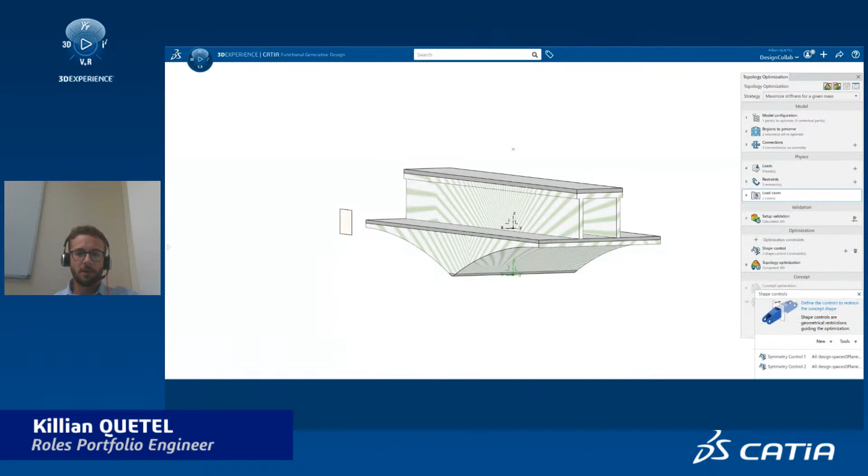So here we can see the reconstruction of the Bir-Hakeim Bridge in Paris, and in reverse engineering we recreate Paris. So here we can see the results. So the functional requirements were the wind, the vibration, the river flow, the subway, and the vehicles. And here we can see that we are on functional generative design.

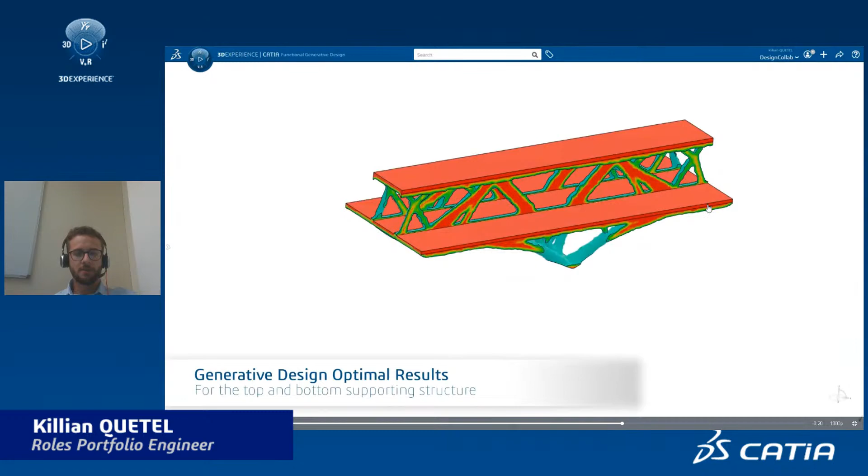So here we can see the design space of one quarter of the bridge. I will explain why later. And here we put the objective of our topology optimization. Here we can see our result of the bridge, and here we can see the reconstruction of the bridge at the end of this optimization.

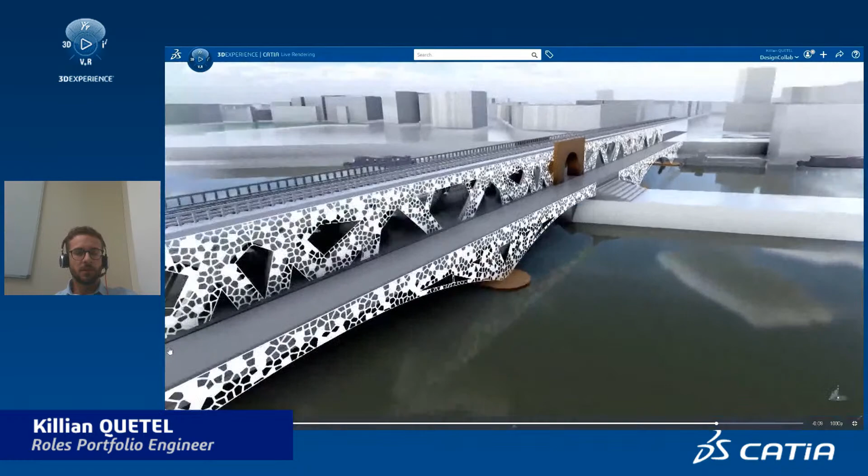And here we can see the final results with a little design we put on the bridge, and a beam reconstruction that we can see here, some beams. We will see later how we did this.

So here we can see the objective of the bridge. So our main problem is to show that with functional generative design, we can maximize the stiffness of the structure and minimize the weight, while we can also minimize the cost. So there is a lot of different scope in our project.

And here we can see the end-to-end workflow. This is what we saw in the video. The top one is about generative design, and the bottom one is about steel structure design. So in our talk, we will just talk about this part, the generative design part. This part is in the project, but it covers a large part of what we can do with CATIA and similar applications—we will focus on the generative part.

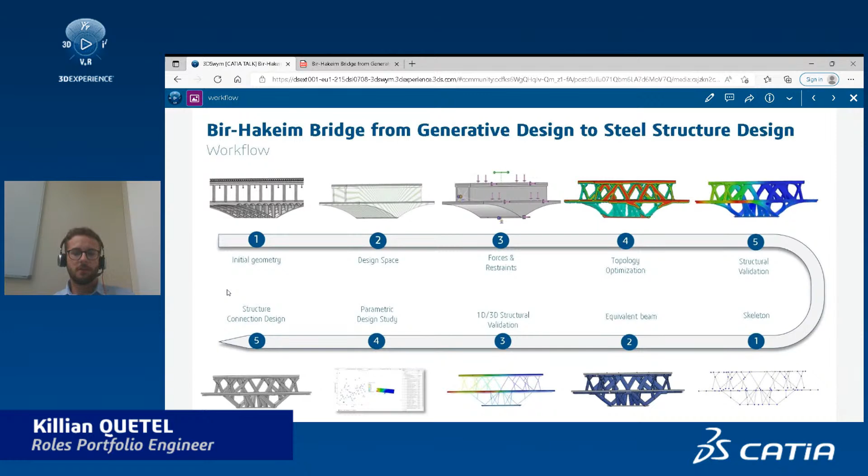So here we can see the first Paris reconstruction. We used some tessellation files to extrude and create the buildings. As we can see here, there are different sizes—here some big buildings, and here some small buildings. And we also put in some famous structures like the Tour Eiffel and Trocadero.

Here we can see the Bir-Hakeim Bridge and some other bridges, and some details like water. We spent about one month doing the full Paris reconstruction and adding details like that.

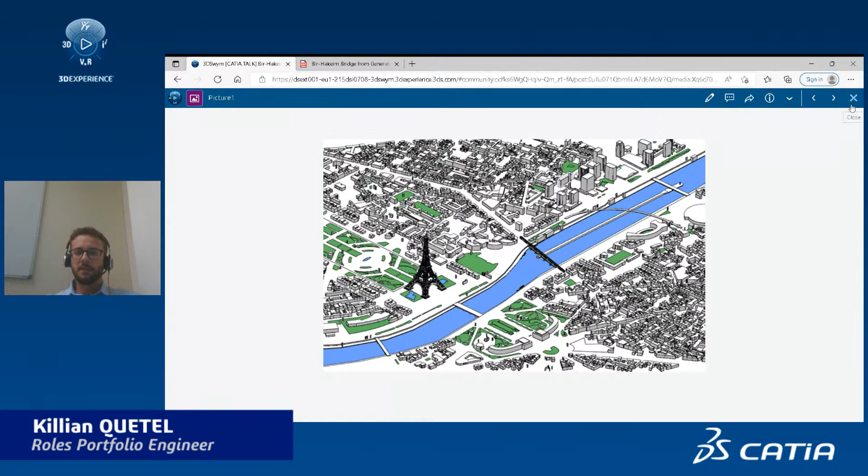And it was very long, but the result is very interesting. Here we can see another view of the results.

We start our project on just 1/4 of the bridge. Here we can see that there are 4 pillars in our bridge, and for our simulation it's better to just study 1/4, as we will have better convergence for the topology optimization, and it will be much easier for our computer to converge into a good result. So we just focus on this part.

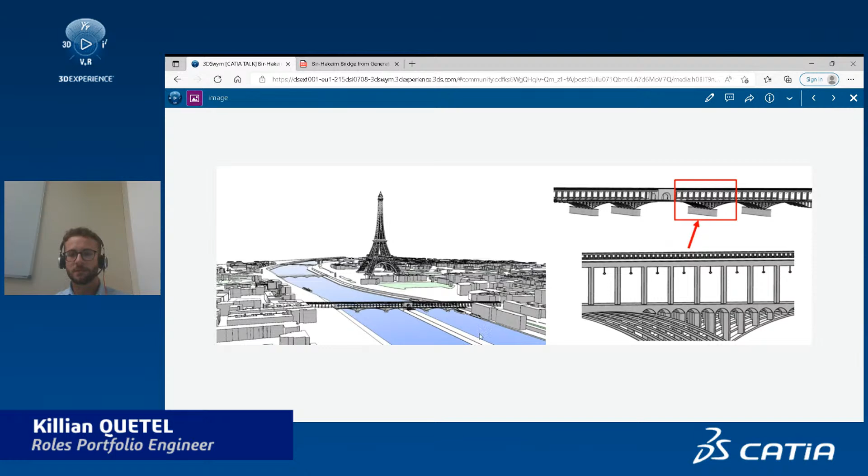And here we can see the generative design part. So we start by doing the design space, as we can see here, to let the barge go through under the bridge, to let the metro go into the bridge, and to let the vehicles go through the bridge.

And here we can see some loads like the metro, the wind, the vehicles, and we put some restraints, as we can see here: the symmetry, here a rotation in X, and here a pivot. You have to know that's almost the same as we have in the Bir-Hakeim Bridge. There is this pivot, and here some constraints.

And we launch our simulation with 27%. So here we can see it's 100% of the mass, and here is the result after 27% of the mass. Our optimization shows this result, which is the best result we can have for better strength while minimizing the mass. And here we can see the final reconstruction using Imagine and Shape.

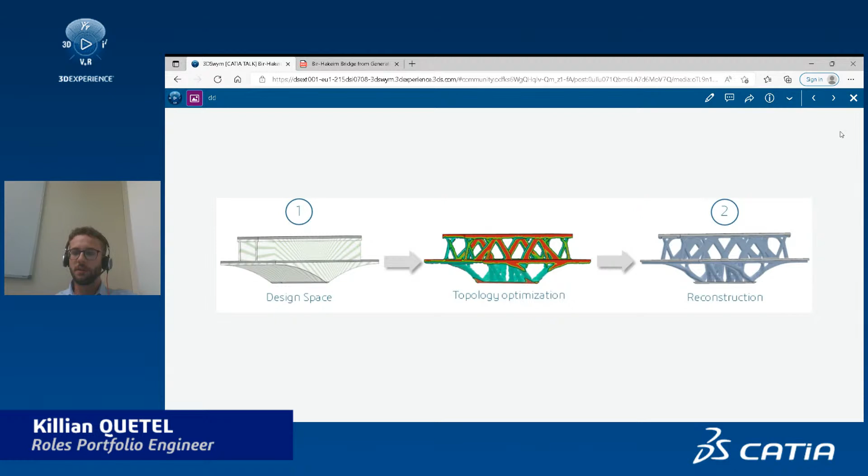So here we can see the results: the displacement and the mass. We can see that there is 70% less mass after the reconstruction, and the displacement is very low.

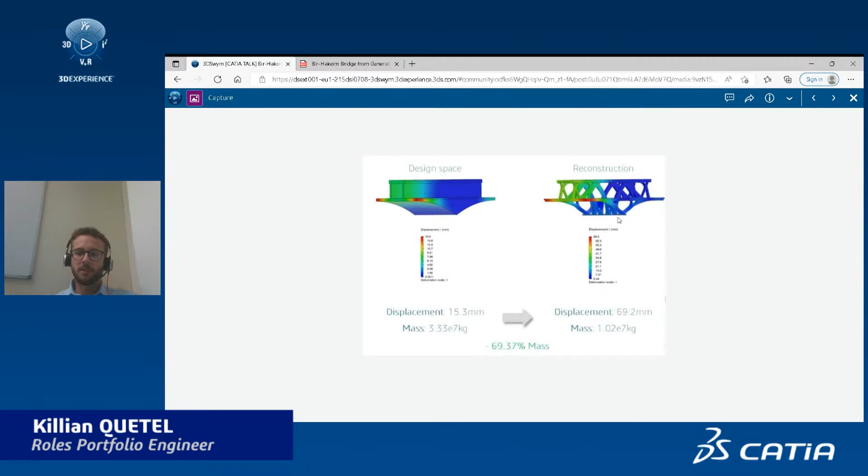We did some calculations that you can see on my PowerPoint in my post, and you will see that it's very good for a bridge.

And here we can see we did some live rendering. So as I said before, we reconstructed our bridge with a design using some beams. And here we can see the bridge inside the city of Paris, and here we can see the inside of the bridge.

And here is the arch which already exists, and we took the choice to keep it because it's from the history of the bridge. And here we can see some beams and some structure.

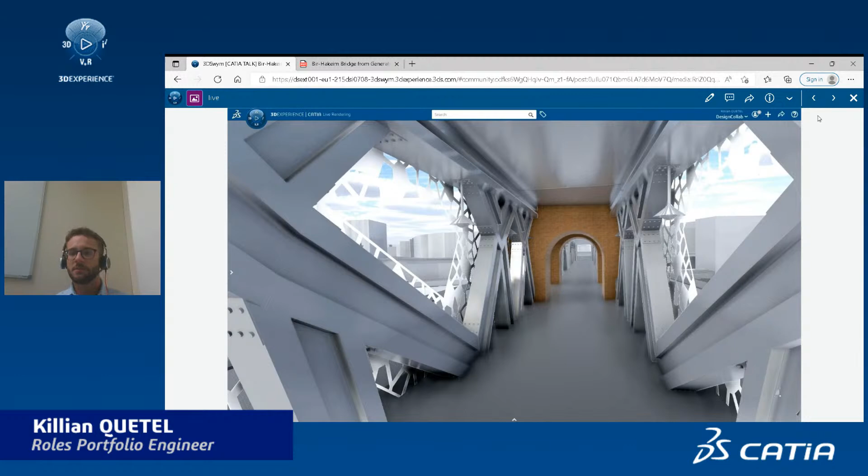So if you have any question, don't hesitate to ask. It will be a pleasure to answer.

Good, thank you, Killian. It's true that's very impressive as a mass reduction. Yes, I have a little question for you. What were the main challenges you faced during this study, please?

Okay, so I think the part which was most difficult was putting the real loads and the real restraints to have the better convergence we could get on the bridge. Here we can see all the forces and restraints. I did some calculations to get the right ones, and we also ran a lot of simulations to get different results. I think we can say this one is the best we found, and it was the most difficult part because we weren't sure that everything we put on the bridge was realistic.

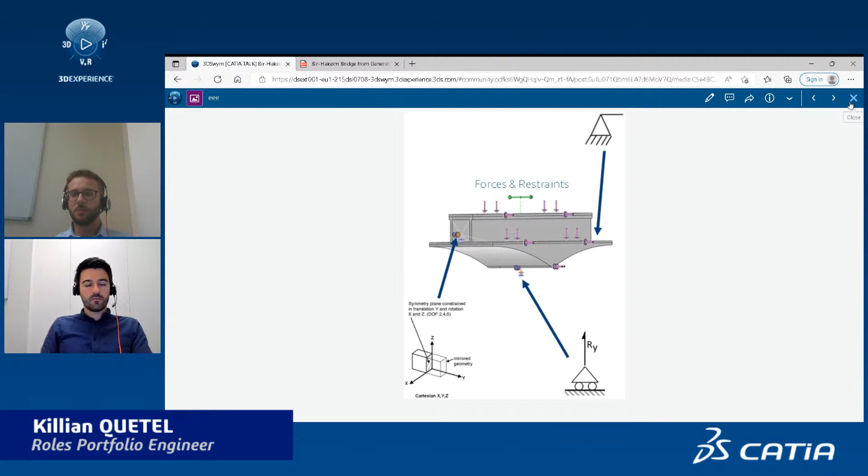We had to do a lot of calculations, a lot of research, because I was with Pierre, we were just two on the project, and I'm not an expert in every domain involved, like an architect would be for that kind of structure. So it was a very difficult part, but we did it, and I think the result is very interesting for the future and for what we can do with this kind of generative application.

Yeah, and I would also add that one of the main challenges was that usually we work on smaller parts where we want to do some lightweighting, and this time it was a pretty big part. We saw that some bridges are now printed through additive manufacturing processes, and it was a challenge for us to anticipate how to manage the optimization, to set up the right thickness control, and all this kind of information that can influence the optimization. So yes, it was a pretty big challenge for us to apply this kind of construction element, to try our solution, and also to see the different reconstruction processes we could perform afterward.

Yes, very interesting. Okay.

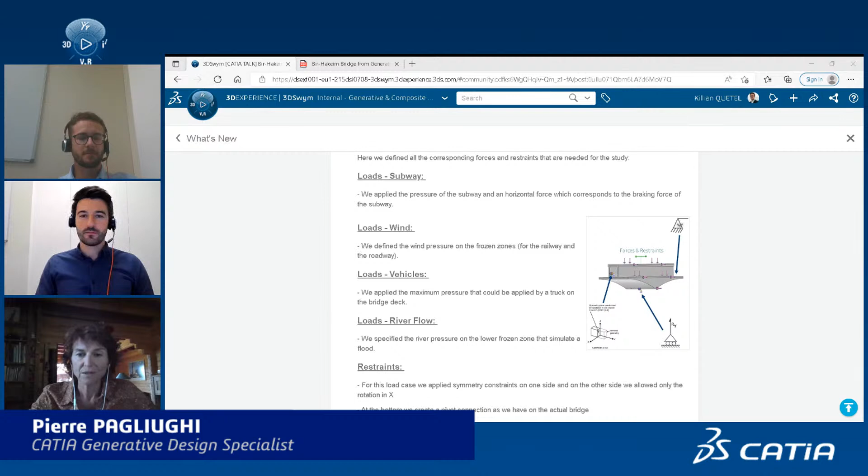Well, I guess that many engineers share these requirements of the reduction of weight and cost while supporting various loads and constraints. So is it difficult to use this approach if you are not an analyst and not familiar with simulation? Is it difficult to reproduce your approach, and how long does it take?

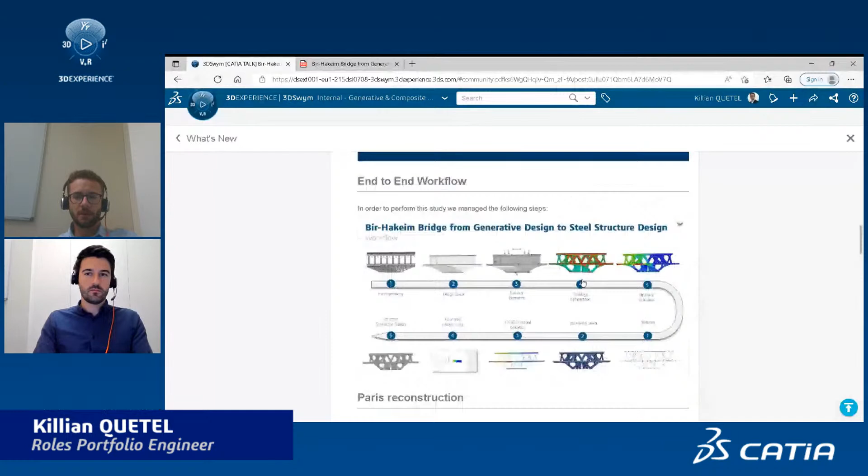Please. Okay, so it's a bit difficult for some parts and easy for other parts. There is this generative design approach. It's very easy because there is an assistant that shows you how to do everything to improve your components. For us, it was a bridge. We have model configuration, region to preserve, connection, loads, restraint, and then we can do the whole setup and launch the topology optimization, and the computer does everything.

So we just have to interpret the results. But the most difficult part is much more in putting the right loads, putting the right restraints, and doing the right optimization, because this part is not very hard to use. You just have to do a lot of research on this kind of bridge to be sure it will match with our results. And yeah, it's about 5 months to do this project, from the beginning to the communication and to do the videos.

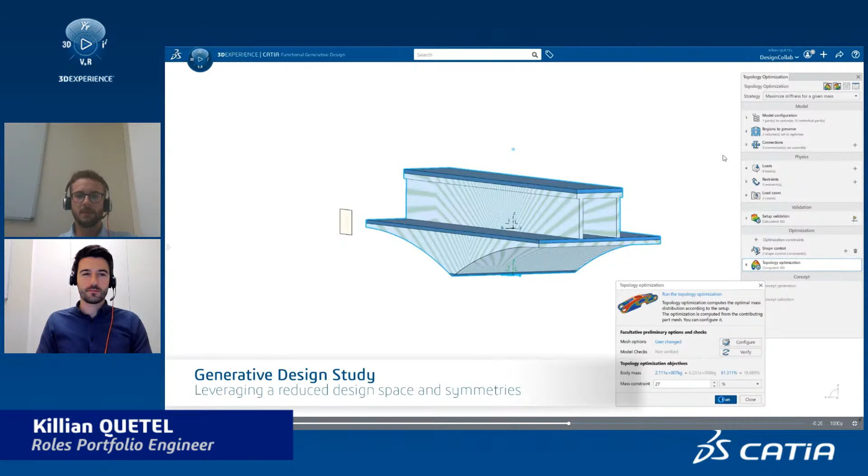In addition, all our tools are supposed to be really dedicated to designers, so we have a lot of tailored ways to manage all this setup. And as Killian said, with this assistant, it should be, from my point of view, easy to reproduce because it is really guiding you at each step, telling you some warnings, error messages. Really, the purpose of our tools is to target from the designer to the mechanical engineer, to be able to reproduce, to go to this topology optimization solution and what we call generative design solutions.

Okay, thank you very much. This is very interesting. Let me see if we have any questions from our audience. Well, I see that many of you are connected, but I don't think I see any questions.